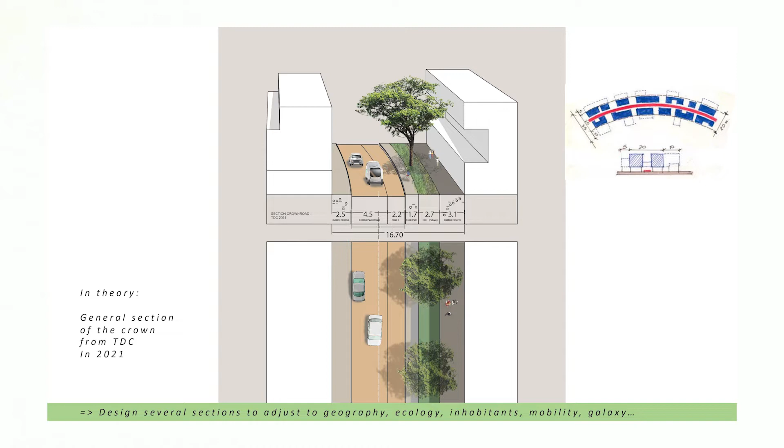Okay, we start by the beginning, which is a section given by TDC. I decided to take only the Crown Road. What you saw from the other presentation is that you have the road and you have the building space, which are hosting the pedestrian circulation. But because we are talking about a very soft, I think it's Ganesh who said that, circulation, we are thinking of electrical, slow, safe circulation.

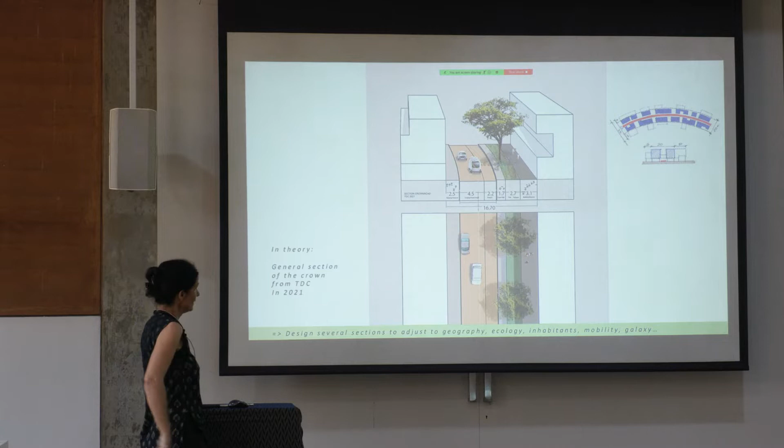I consider the Crown Road as a place where we want life to happen, to merge, a meeting to happen. So if you take the section of TDC, you see a road of 4.5 which will become 2 plus 2, so 6.7. I'm in meters because I'm French, and I insist on meters, I'm sorry.

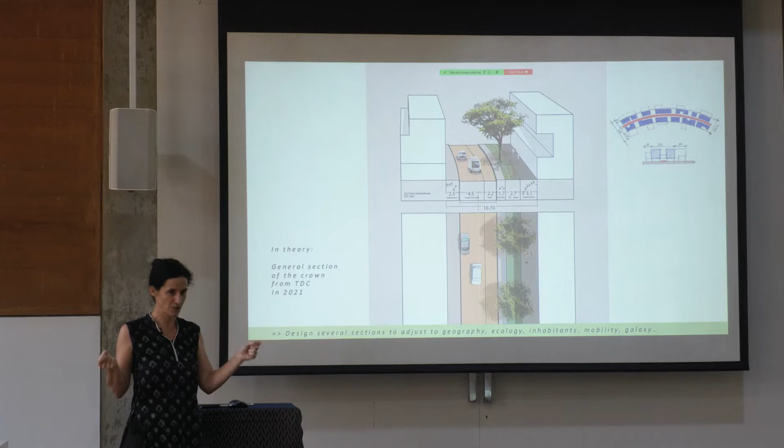So it's good to have this measurement in mind, because the width of a car is 2 meters. The width of a public transport, a bus, is 2.5. So keep this scale in mind, because that's really what I will question, the scale of the road.

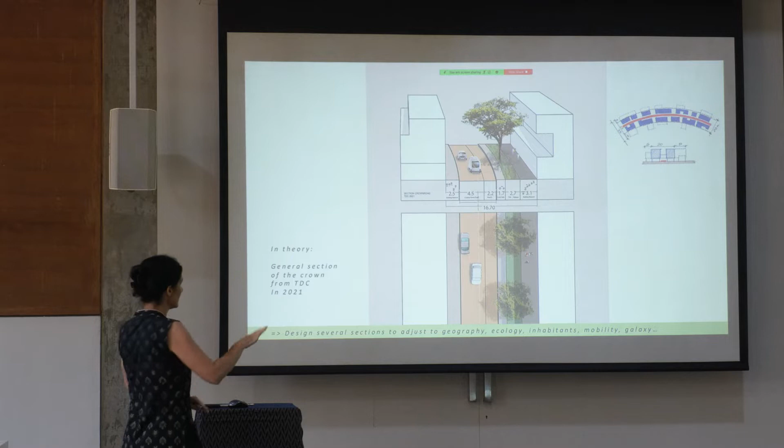And then you have, of course, as they said, infrastructure, a cycle path linked with the green. And this is working for me because you have the two facades of the building at 16.7. This is abstract, this is theory. It works because you have this feeling of framing by the building.

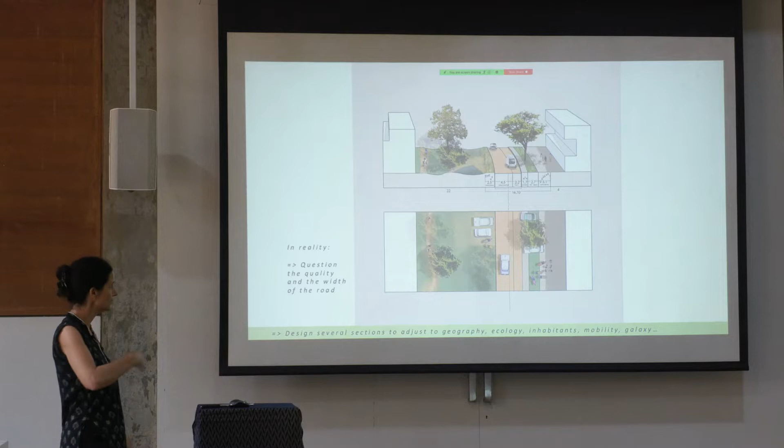But because the road today is a road with fast vehicles, polluting vehicles, noisy vehicles, no one wants to be closer to this road. So the public buildings have a tendency to go much further away from the road, which results, for example, for the library being 22 meters away from the Crown. Kalpana is 4 more meters away, and that means the space in between is not whole anymore because of the quality of the road today.

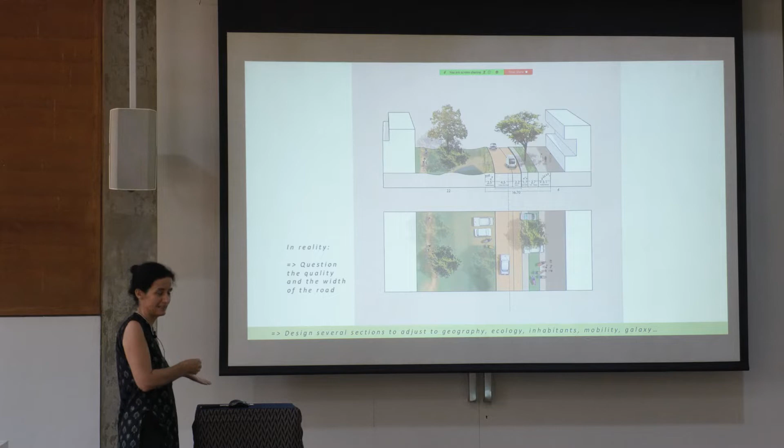So in this space, which is left free, which is not organized because it was not supposed to be like that, you see a lot of wild parking, vehicles. You see a lot of things which are not addressed. So from that, I will question the width of the road and the quality of the road.

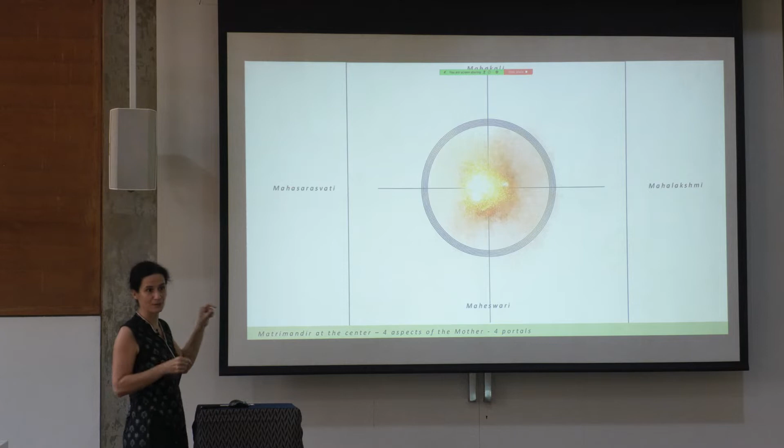So you see this Matrimandir, the 4 portals from the 4 gates of Matrimandir - Mahalakshmi, Mahakali, Mahasarasvati, and Maheswari - which are also, by the way, the 4 parks. They all have an impact on the Crown. The 12 gardens, which give also a direction, a sense of where we are, so it's not boring, like Ganesh was saying, in this Crown.

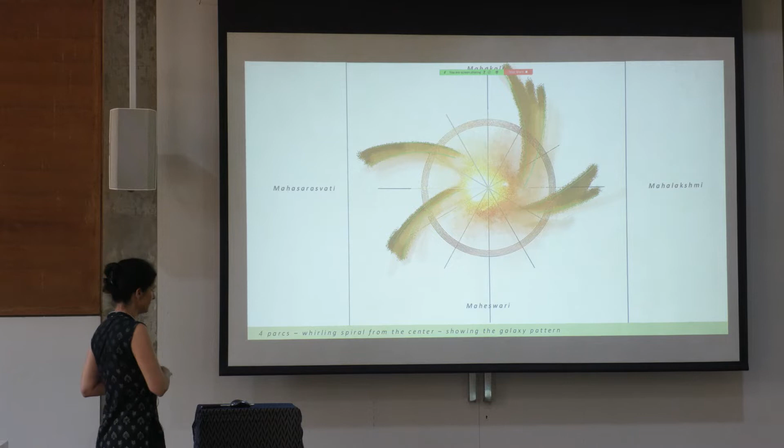Something happens each time, and the 4 parks, which are the ones I mentioned last year - that's exactly the design. The green lines are the lines from the master plan, and each time they intersect with the galaxy, with the Crown. So you have the green line and you have the blue line.

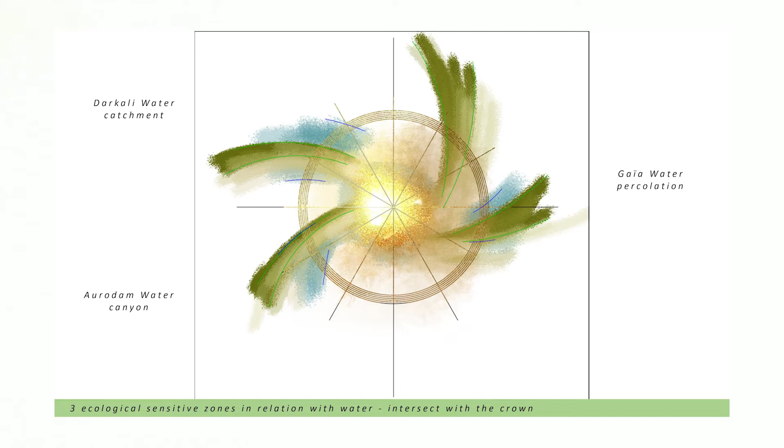The blue line is the ecological sensitive zone. You see in Gaia all the percolation areas that we need to save. In Darkali it's also related to water, but a different type of water - Darkali catches the water before it goes to the canyon and before it goes to the village.

And Aurodam on that side, which is a canyon also, and you can see there is a kind of relation with the park. And that gives a kind of perimeter on the Crown to say, oh, something is happening here - there is another priority than the circulation.

And that means every time it crosses these different things, I decide to reduce the size of the Crown. I decide that in the park, when a Crown road is crossing the park, it's the park that has priority. Which means, yes, we can still have this experience of wandering around Matrimandir, around the city center, around the city, but something else is happening, and I'm not the first one - I have to slow down and acknowledge what is happening there already.

So you can see that in these two parks, I decide there will be only one lane - let's call it lane, we don't know what it means - but there's only one lane, narrowing the Crown significantly. While here and here, something a bit different will happen, mainly here, because sometimes if I reduce too much, that means I will have to put this traffic somewhere else, so I will not save more place for nature because I will have constantly different intersections.

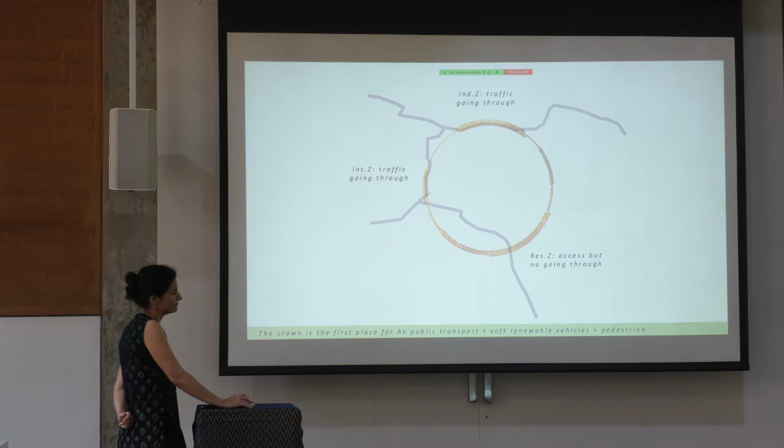We have an idea, which is for this part, which are not pedestrian, we let the traffic going through. You are maybe not well oriented, so this is visitor center, and this is Alankuppam and Kottakarai, and this is the college road, going through. So I imagine that, okay, maybe today, we are talking about DDP, we are talking about 5 years. Today and for 5 years, we will have to deal with that. We cannot just stop the traffic. So we need to live with that, but that doesn't obstruct us to dream about something else, which we have the power to work on.

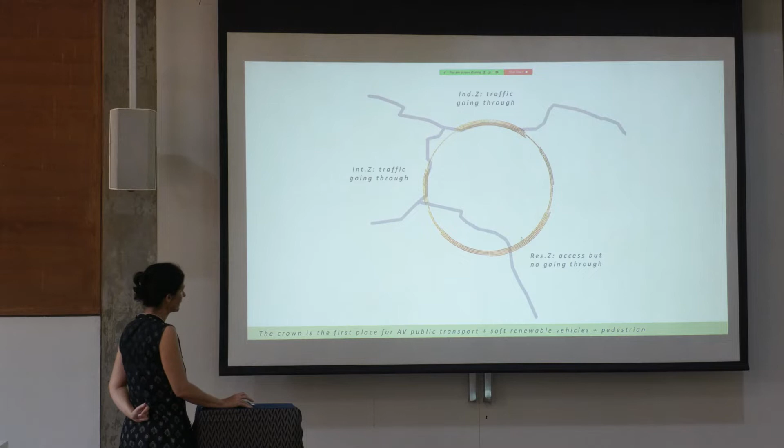And it's the other section. Here, I don't consider this to have, this is a solar kitchen. I don't consider this stretch being traffic going through, but the traffic can come from here and filter, maybe be just access. Let's see how we can solve that.

So go back to the 4 parks. It's a bit complex, but in this green, you have the park like the master plan. Then in this green, you have what you call the forest of Auroville as it has been planted and developed. Let's remember that the trees which are here are not just coming by chance. It's because it's a new forest here, because people have planted in this area. So I think it's very good also for our future planning that if we want to have a park here, here, or here, we need to plant it.

It will not happen just like that. It will happen if we wait for decades. But if we want to have the park, because we want to have a city, we need to plant it now. And then I extend, when you see the section, the intersection between the crown and the park, it is very small.

It's about, this one is about 60 meters, which is very, very small, to 200 meter maximum, the stretch of the park. So if you go through with a fast vehicle, you don't even see it. You don't even have your green corridor aspect that you want or your filtration.

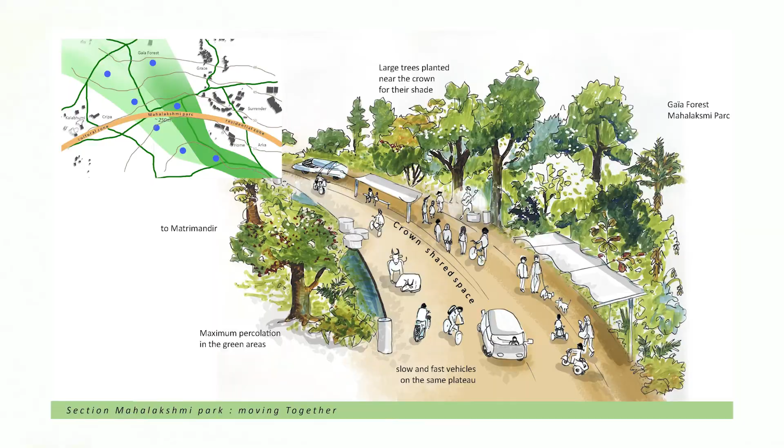So let's go to all of the park. Mahalakshmi Park. So you can see on this little drawing here that the official lines are here, but I double it. That means it's about 250 meter stretch. I double it in order to really have a space which gives this feeling of park.

Every vehicle is on the same plateau. We don't have a curb to limit the road. We really have a connection with nature on both sides. Because it's quite large, we plant tall trees close to the road.

And eventually, once we wait for the tree to grow, we can create shade structures in this area. I start by thinking there will be no buildings in this park stretch. There will be many buildings in the other section, so when I cross the park, I have minimal buildings. I can have a shade structure, a pavilion, something like the shuttle or AV shuttle station, but not a regular facade. The facade comes from the tree itself.

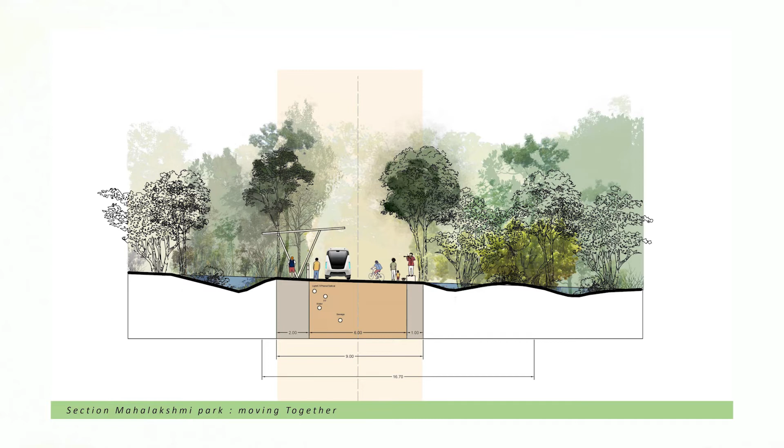So that's a section on the same park. I put 6 meters of road for the electrical AV shuttle that will cross all the area, and that will be much more regular than today. Today this doesn't exist, so we have very frequent public transport in this area, but we share it with bicycles and motorbikes.

Sometimes, along the road, there's a place where something is happening, like what you may have experienced in other cities, a bit dense in the street, where someone suddenly sings, someone juggles, someone does capoeira, whatever. Something is always happening in this space.

And I keep the 2 meters and 1 meter, so at the end it's 9 meters. That's for what I call infrastructure, but it's not really infrastructure. It's for anything built, a little shade or something like that. It doesn't have to be a small shed. It can be a very urban and modern shed. It doesn't have to be rustic.

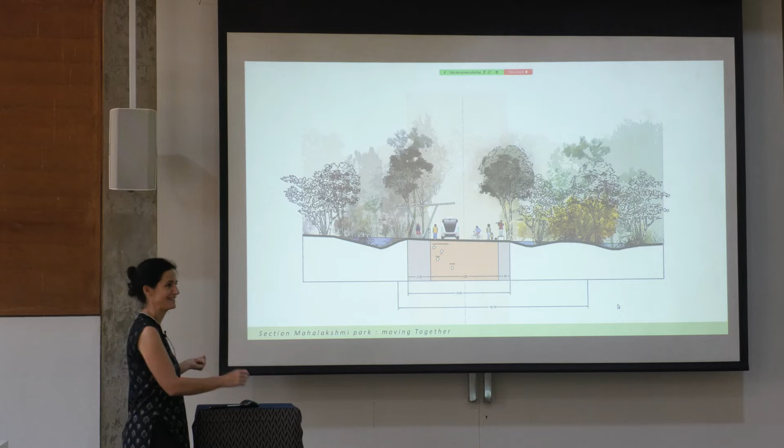So I have a total of 9 meter road compared to the 16.70 width that the brief is giving us. But again, it depends how you see things. If you consider that the road should address percolation problems and green plantation, we can imagine this is also the crown space.

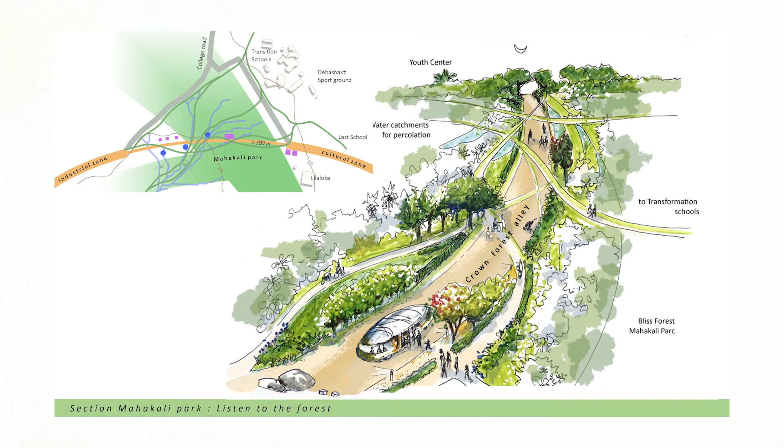I go to the top one, Mahakali Park. On this little sketch you see that's the stretch between here and here. It's 300 meters. You probably know that space, that there's a road here which connects to College Road, which means it's traffic that we cannot influence right now. We need to put a lot of work and effort toward the Panchayat and discuss with the villagers and the bioregion in order to prevent the massive traffic that we can have from here.

So here we have only one stretch for only the EV shuttle, and we have a series of different experiences along this road, which is for anything, pedestrian, cycle, it's similar. So if you arrive here with your EV shuttle, you can go on and you're directly there. If you're with your cycle, you can meander all along this place.

And it's very important that we don't have polluting, noisy, fast circulation traffic in this area, because there's a connection with the school here. It's the connection between the center and the school. And it's really a radiating connection between the diagonal.

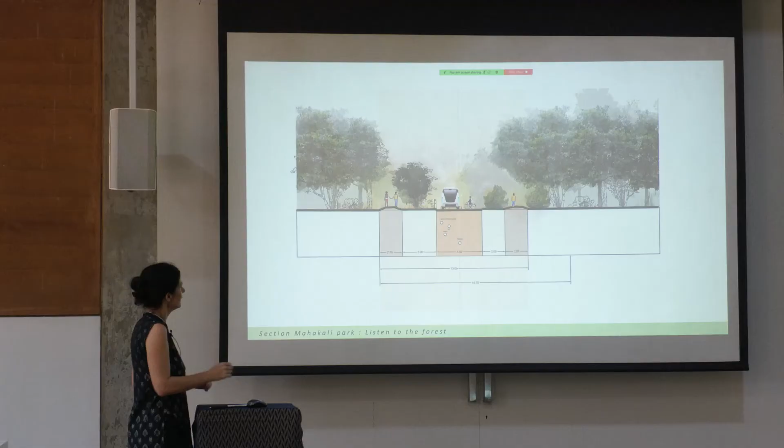I don't need to have a lot of shade. I don't need to plant large trees here because I have this space here which will provide the shade that I need during the day. Because I reduce the horizontal open space and section it with other green areas, I don't need to create more shade.

And that means you have more chance to address the pressure from the village. And in this area, you simply have a catwalk going from this point to this point. Yes, my experience around the crown is always this circle. I know that I have Matrimandir on that side. I know I'm on this circular pedestrian path, but I don't need to go with my big width of road.

So all the infrastructure goes here, and then a bit further we have the road on that side. And we can repeat this curve with the different areas that we need to build in order to catch the water. And it can become totally a place just to enjoy, to see, to go.

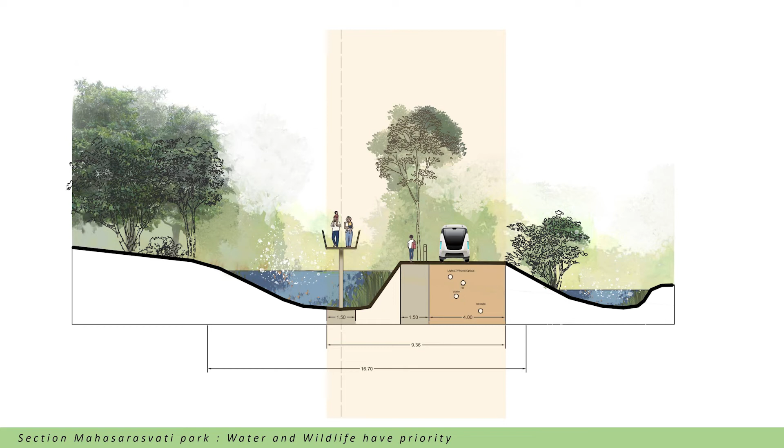It's a goal, no? That's a perfect circle from the 690 from the banyan tree. I mean, it's pedestrian, it can be cycle if you want, but I think it's more easy to go there. And again, I have 4 meters because I really want to have my shuttle going there.

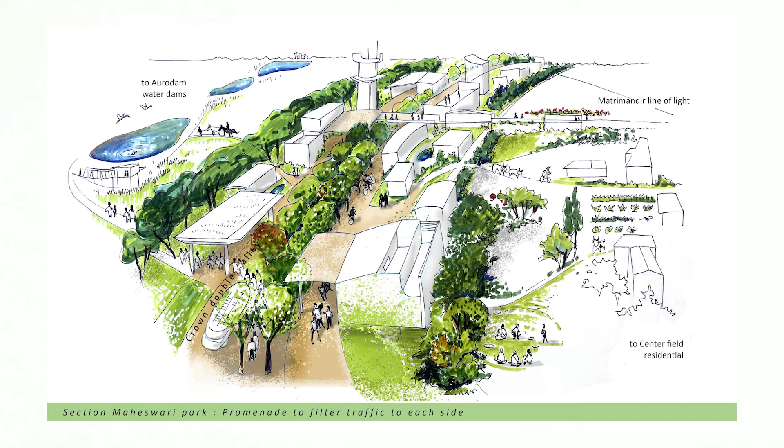Then the last one was a bit more difficult, 60 meter only stretch. And I realized that Aurodam is quite far from the crown, so I'm not sure I want to invite whoever will come to the crown to the Aurodam canyon. Yet I think this place has, it's much further, the canyon and the dam of Aurodam.

And we have a lot of housing and buildings already here on this. So I would imagine the crown more to be something which is enclosed and stay. It's more a filtration for the noise, you see here there is a car of a student, of kids who go that way. So maybe it's good to filter on both sides.

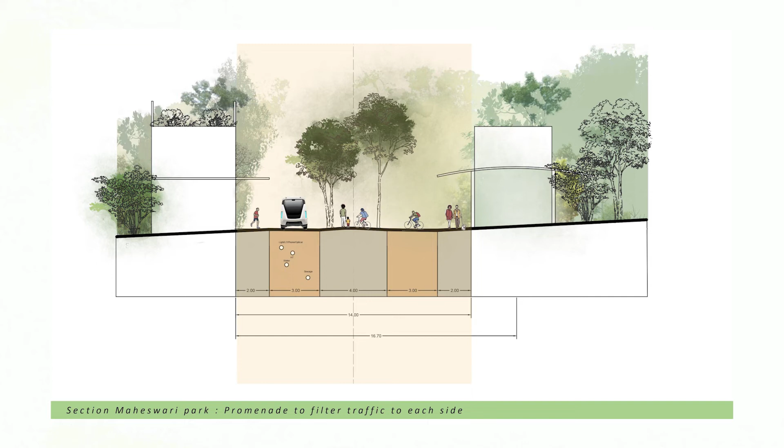And we can use a lot of plantation, and here you see a double alley of trees in the center. So the center becomes 4 meters of shade path, promenade. I think you saw it in some reference picture of Sonali this morning. So you have the shade from the tree in the center, and that's the living place. That's where you meet people.

And then you have the circulation on both sides, which can be reduced. And then you have your buildings on that side. So here you have 14 meters with quite a lot of space.

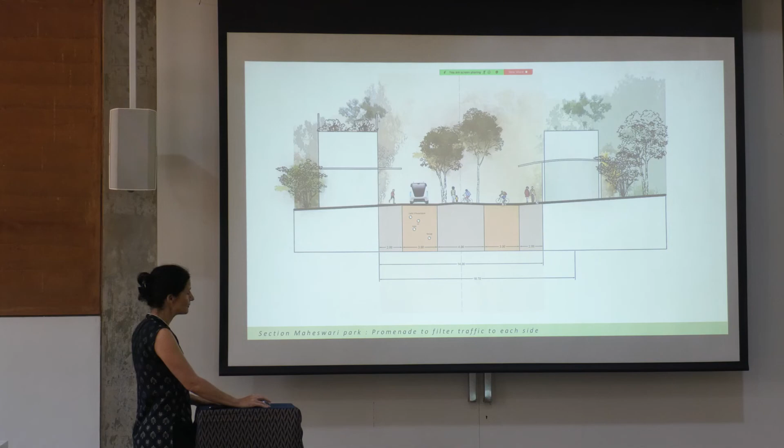Each time I put the infrastructure under the road, because I imagine that we have always a second road if we need access and if we need to repair, we will have always this part to use if we really have to have access to it.

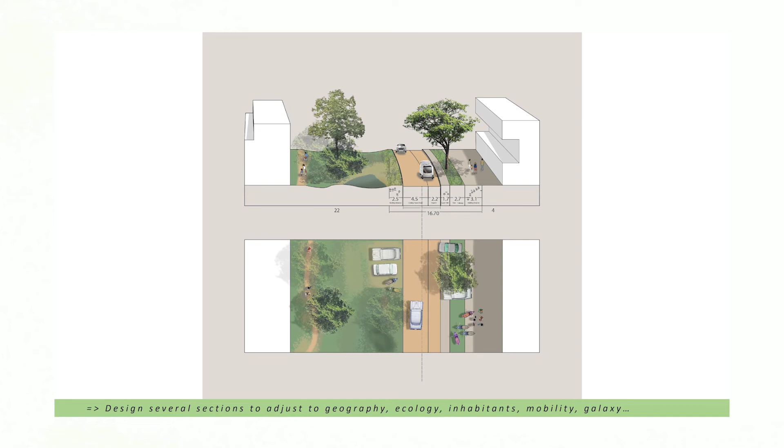Coming back to the existing stretch between PTDC to Arca, so that's what we have today. And what I would imagine is really to reclaim the paved area. So we have about 7 meters, the road is not 7 meters, but there is an extra place where we can't plant trees, so I cannot provide shade. So the idea was to create another layer closer to the street.

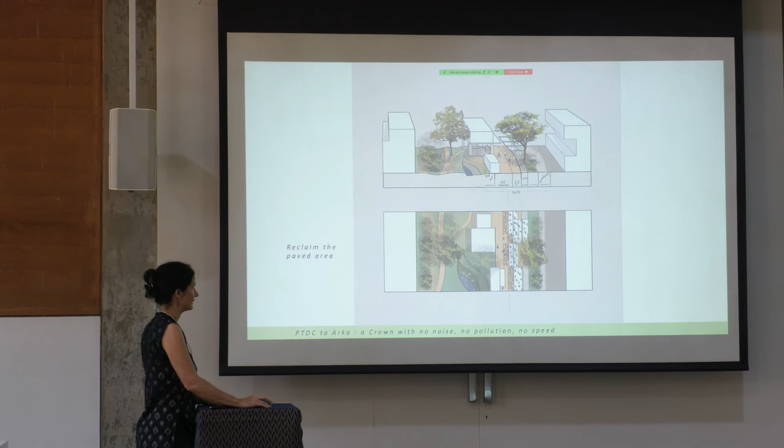Because it's not a road anymore if we go for pedestrian and public transport. And this will be more at the scale of pedestrian cycle. So you imagine you have your bakery delivery here, you have ice cream on that side, and you wait for your shuttle. This is what I try to draw here. So you recognize the solar kitchen here and Pour Tous on this area, library, Kailash, Kalpana. And you have the existing road from Certitude.

Again, I'm talking about the next 5 years. So what will be fantastic is that in 10 years, it will not be even there, the existing road from Certitude. But within 5 years, the priority is really to shift from a normal road to a pedestrian public transport road. That will help us to reclaim the paved area and to live here, and so it's not just by decision, it's quite a lot of work that we have to put into that.

We can imagine to create a lot of shed structure on the street, but also to create a space for the bus, for the workers to go to the village and to have a special rate and to have a special node of transport. I imagine to close this part to car, even the Aurovillian car.

But again, we can imagine a bypass on the back. We can imagine a fast tag system for those who have that. But that means also we have this place here where we have our car, the Aurovillian car. You can park here. So if you want to go to Pondy, Chennai, Bangalore, whatever, if you need your car, you still have the car here.